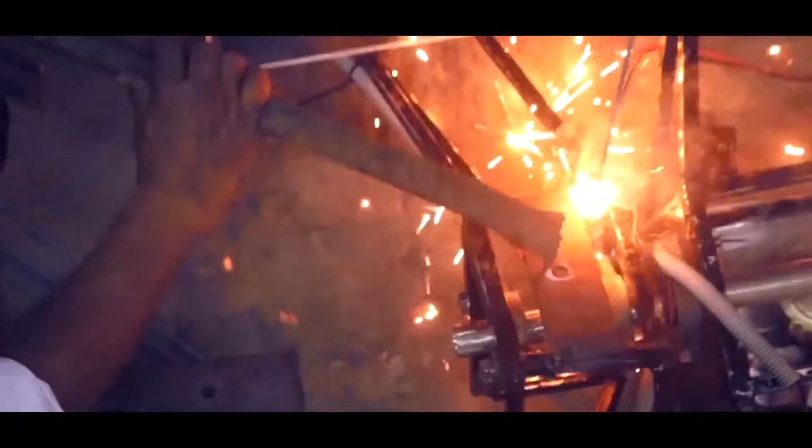The drive system consists of 4 wheels, each driven by a high-torque worm gear motor. These motors are self-locking, so it ensures that when there's a sudden power failure, the wheels will automatically lock and prevent the rover from suffering serious damage.

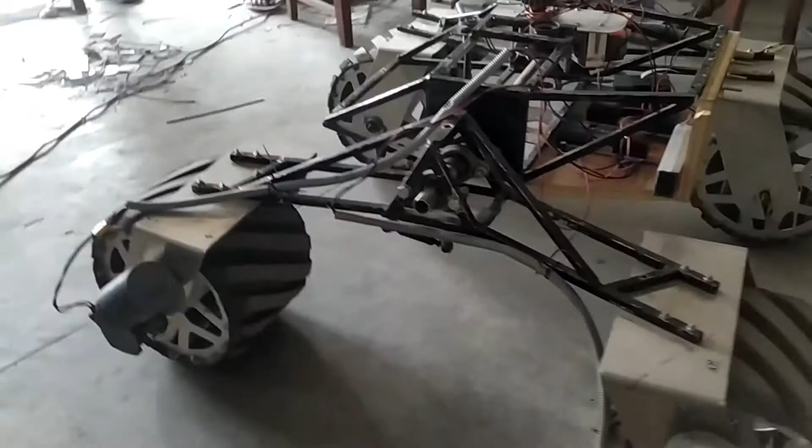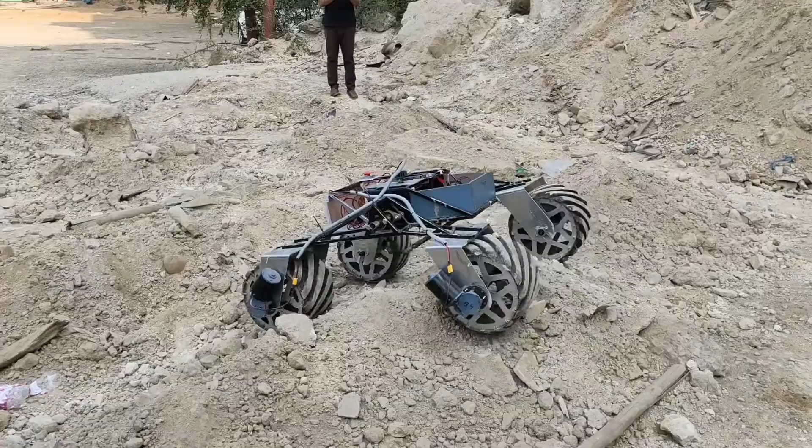For the suspension system, we implemented a bar differential mechanism with a counterlink. This ensures that when the wheel on the right goes up, the wheel on the left will go down, and the body will remain at an average angle between either wheel. So when the rover goes through rocky terrain, there will be minimum jerking of the body.

This suspension system is more lightweight than the 6-wheel rocker bogie mechanism. This year, the counterlink was shifted under the body to make more space on top. Here, we can see our rover traveling through extreme terrain with great ease.

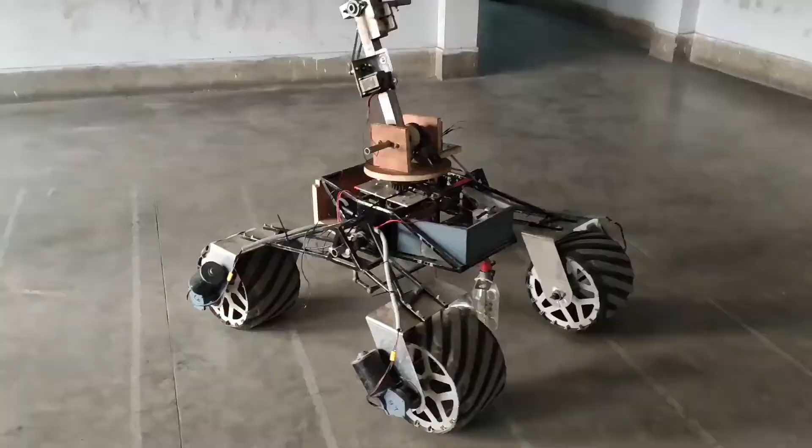We have implemented an industry standard emergency stop button, which is easily accessible and can kill all the functionalities of the rover with a single press.

We have built a 6 degree of freedom rover arm for the European Rover Challenge 2024. Let us see how we made this happen.

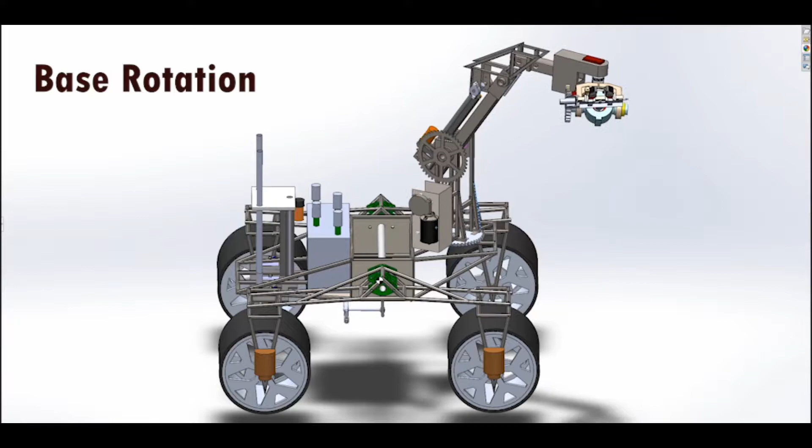The very first movement our rover arm does is the rotation of the base. In the shoulder joint, we have used a stepper motor along with a custom-made gearbox to ensure high torque and precise movement.

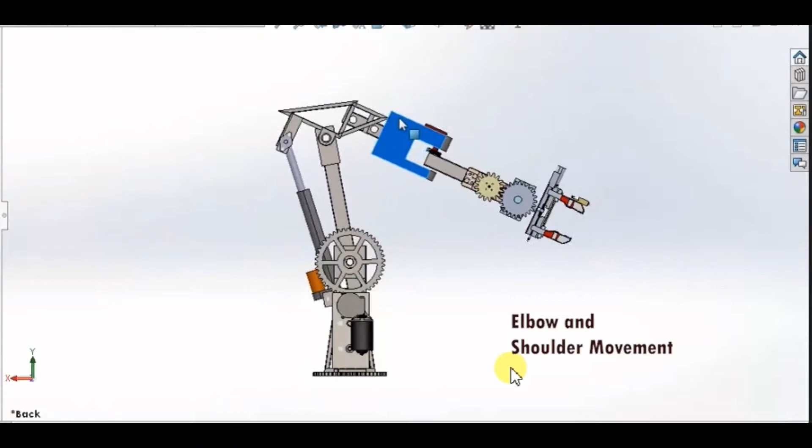In our elbow joint, we have used a linear actuator. Here we can see how our shoulder and elbow joint combine together to help our rover arm create complex movements.

For our fourth degree of freedom, yaw, we have used a 60 kg torque servo motor located in a 3D printed holder.

For the pitch movement, we have also used a servo motor, but this time we have used 2 gears with a 3:2 ratio, which helps us increase the torque so that our rover arm can handle heavy loads.

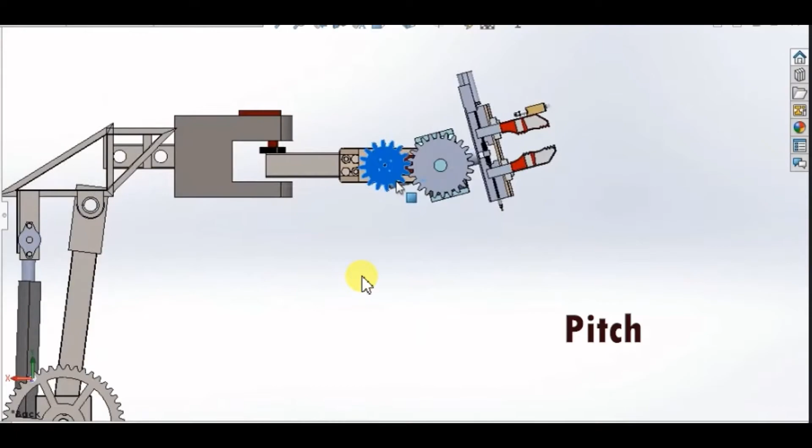For the roll motion, we have used a 5 RPM DC motor placed in a fully 3D printed custom setup to ensure accurate and precise movement.

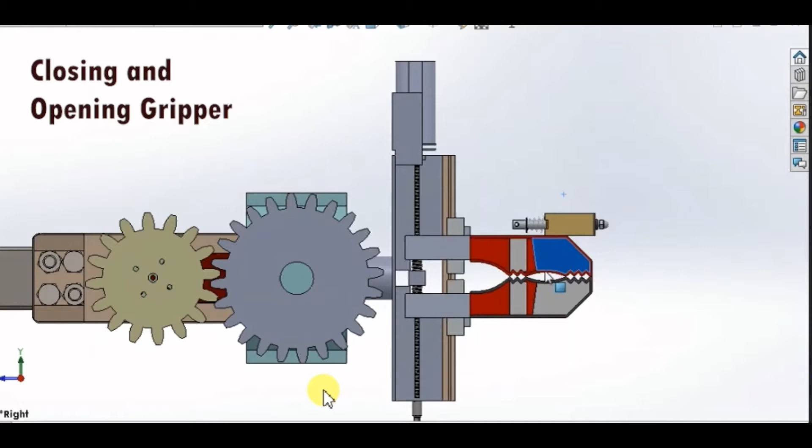We have 3D printed our gripper to ensure that it can grab objects properly and flip switches accurately. A lead screw mechanism was implemented for the opening and closing of the gripper.

To develop and test our software, we have created a simulation of our rover using ROS and Gazebo. Here we can see the rover being teleoperated, with the arm manually controlled in simulation.

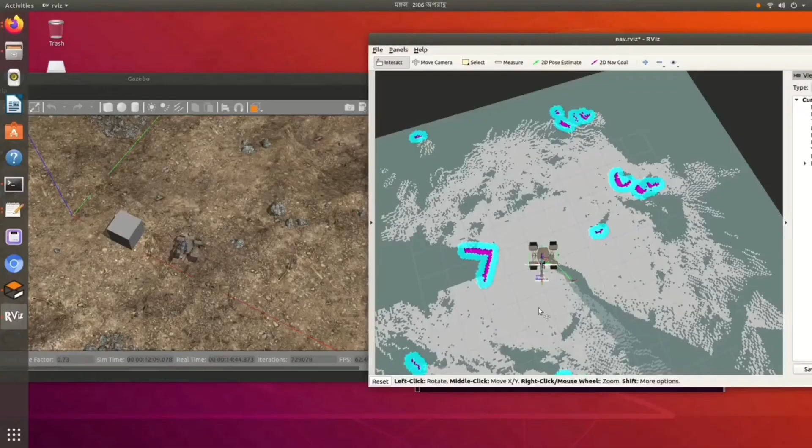We also tested our autonomous navigation algorithm using the simulation. Here we see the rover navigating autonomously, avoiding obstacles.

Finally, we tested Move-It motion planning for the arm and operated the arm using inverse kinematics based control.

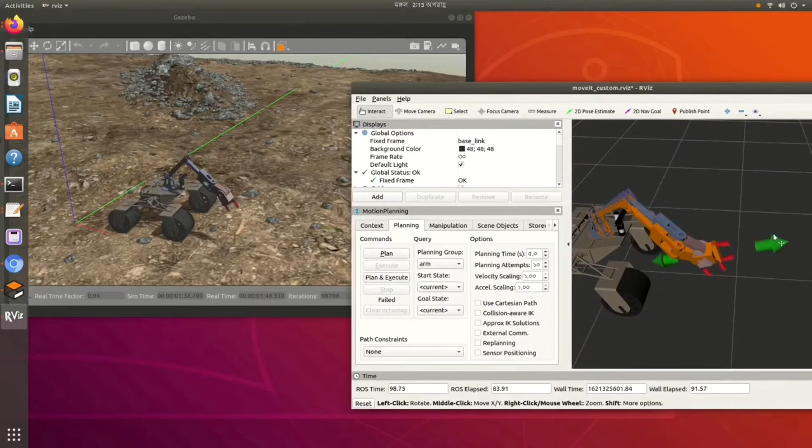For the science task, we need to create a geological map of the Marsyard. We will be using CorelDRAW to create the map with proper legend and color coding for all the geological features.

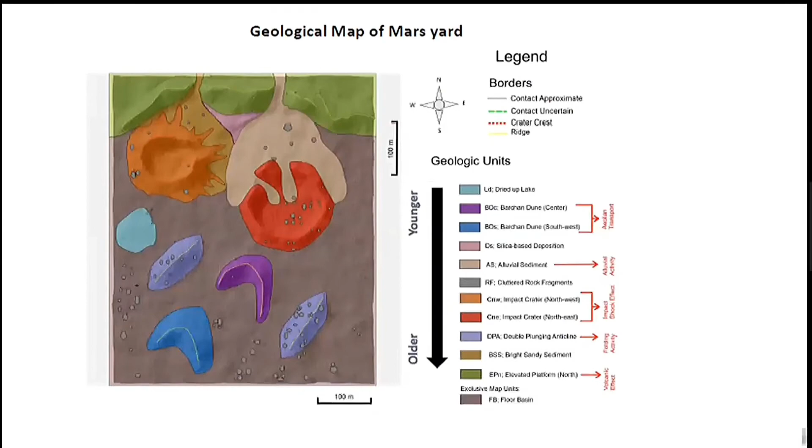As we have previous year's DEM files and drone images, it will help in preparing ourselves. We will also research the Northern Elysium Planitia region of Mars, which is the selected region for this year's mission. This concludes our video demonstration.